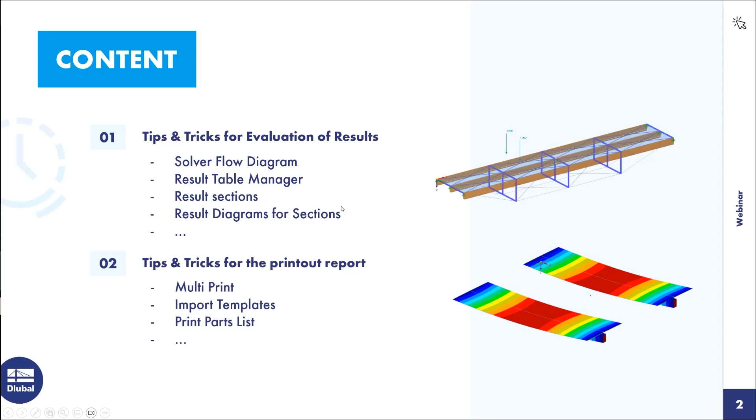I'd like to continue with the agenda for today. The first topic for today are tips and tricks for the evaluation of the results. Here I'd like to show you the solver flow diagram, the result table manager, the result sections, and also result diagrams for the several sections, and some more. The second part of the webinar will be about tips and tricks for the printout report. Here I'd like to show you the multi-print, how to import templates, and how to print the parts lists, and some more functions. Now I'd like to jump in the program.

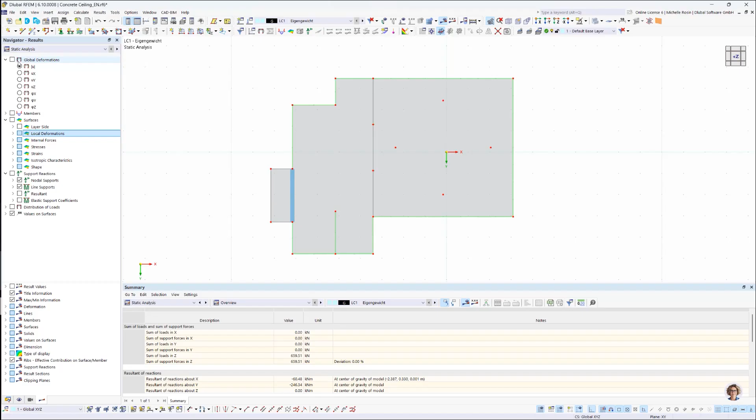Here you can see the model for today. It's a reinforced concrete ceiling with a joist and a balcony. For a better overview, I'd like to hide the reinforcement. I already did the calculation for this model. And the first thing I'd like to show you is the solver flow diagram. You can find it in the result table.

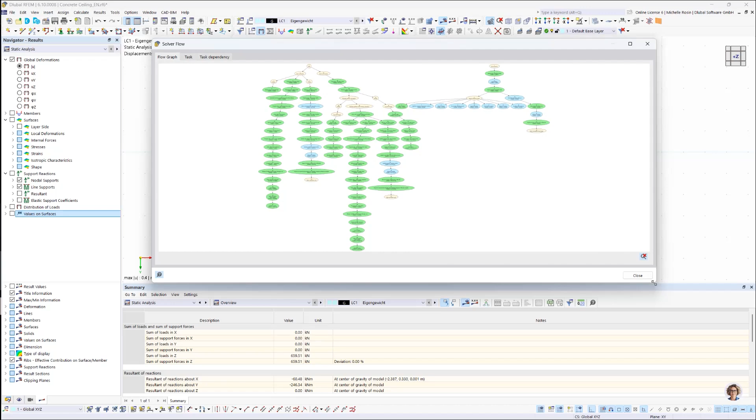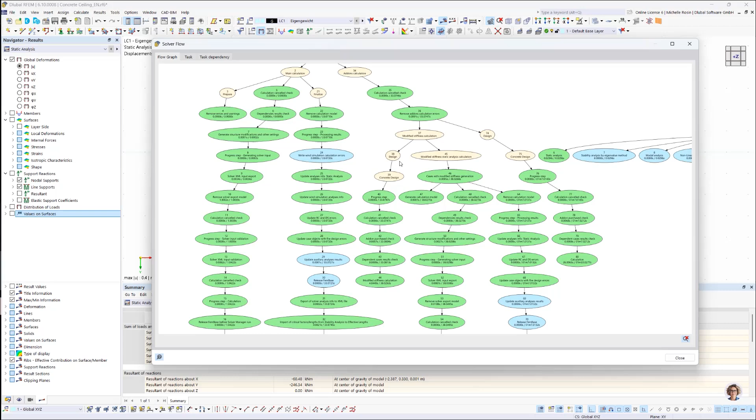It shows you what was calculated in which order, and shows you the dependencies of the several steps and how long the individual steps took. This can help to recognize problems in the calculation process and to identify problems with your hardware or to change something in the settings of the program.

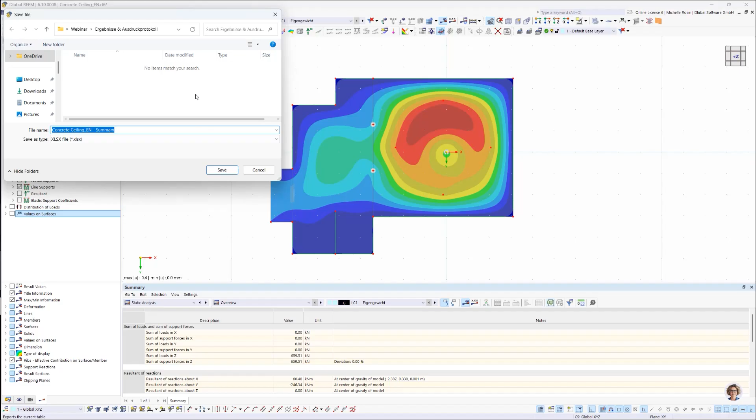The next thing I would show you is the export to an Excel table. You can also find it in the result table here, and when you click on the button, your file browser will open, but we don't save it yet. First, I'd like to show you the result table manager. Here you can display and adjust the filter properties of the result table.

It's also interesting with regard to the printout report, because by default the properties are taken from this result table, and if you can't find something in the printout report later, you can also look in the table manager to see under which headline it's assigned. You can also filter the displays in the result table. For example, when you just check or uncheck the fields.

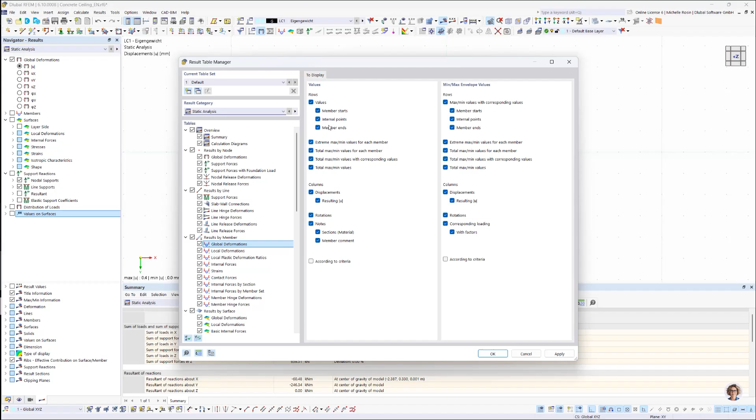And on the right side, you can also see many more filter settings to adjust. For example, you can also display only certain values and set the criteria here. But we uncheck it. You can also make your own templates. For example, when you click on create new set, you can make a template for your further project for the result tables.

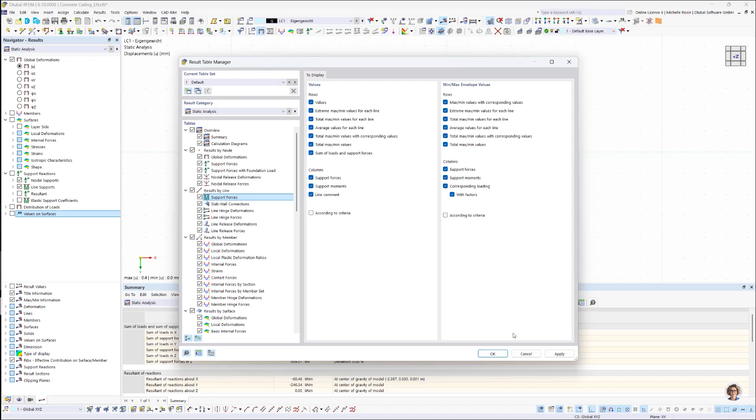The next thing I'd like to show you is how to search for special objects in the model. This is especially interesting when you have larger projects, because you can lose the overview of your members or nodes or something else. And for example, you can go to the navigator data and right click on the object you want to search and click on find. Then a red arrow appears here and shows on the object you selected.

You can also search the objects in the result table. For example, when we go to results by node, you can click on the node or the object you want to search, and then also the red arrow appears in the model.

Next, I'd like to show you the result sections. For this, we go to the navigator data under result objects and click with our right mouse button on the result sections and click on new result section. We have the possibility to define our section by 2 points and a vector or a line. Today we choose 2 points and a vector and can select our points here.

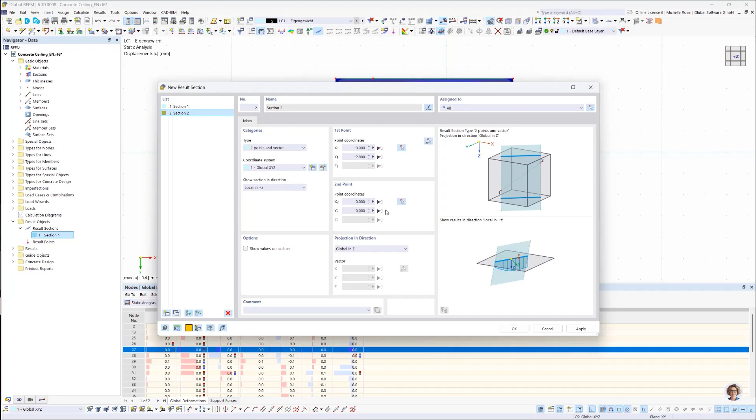The direction is the Z direction, that's correct, and I go to apply. Okay, and then we see our section 1 here. If we want to create another section, we can double click on section 1 and go on create new object and create our second section.

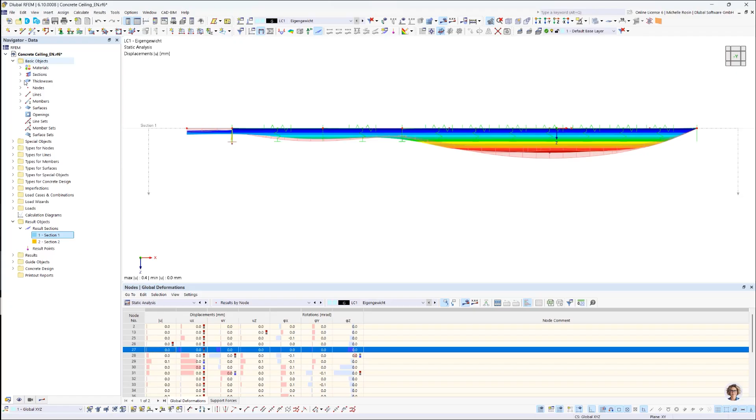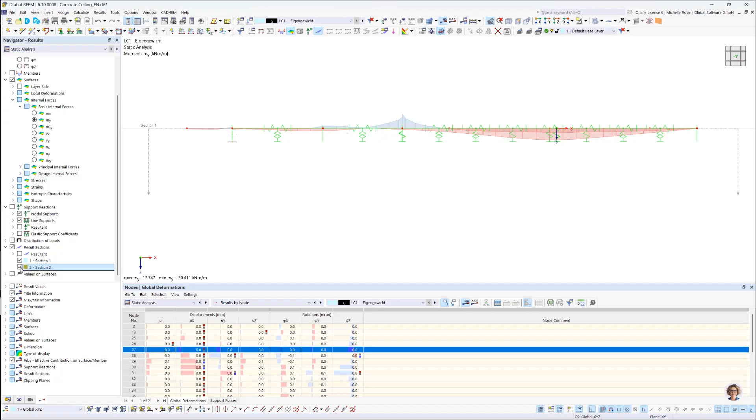Okay, now we have 2 sections, and we can also see our results here, but we don't want to see the global deformations. We can, for example, select our internal forces now and show it on one section or also on both sections at the same time.

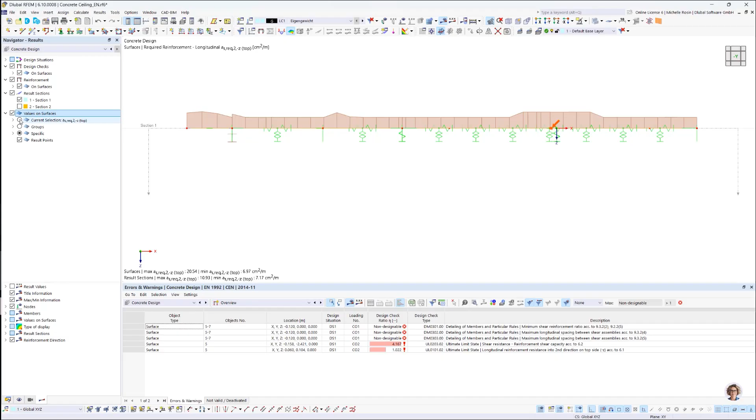But I'd like to show you the values for the reinforcement on the sections. We go only on section 1, and we can also click on value on surface and select current selection. Then we can see the values for the reinforcement at the different points.

Next, I'd like to show you the result diagrams. You can also select your sections here and check what you want to see here. You can also overlap the numbers so you have a better overview. You can also overlay your result sections when you type in this field 1 and 2 for the section numbers. And as you can see here, you have now both sections overlaid. This can be very helpful to compare the different sections with each other.

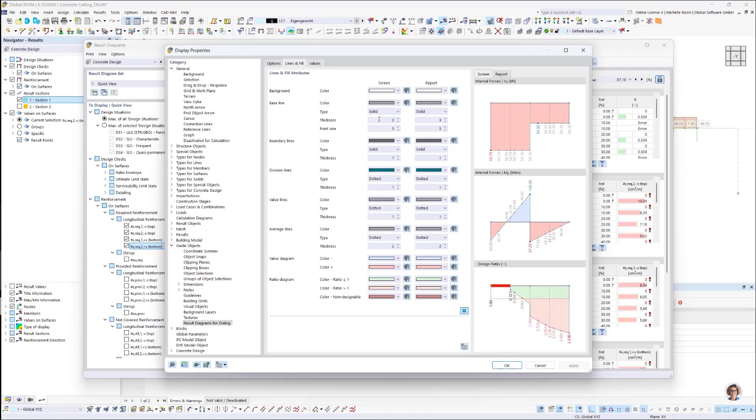And again, you have many settings for the display properties here. You can select which items or values should be shown or not. And you can also define the colors, etc. for your screen and for your printout report separately. And the red line here indicates that the area of the surface cannot be calculated.

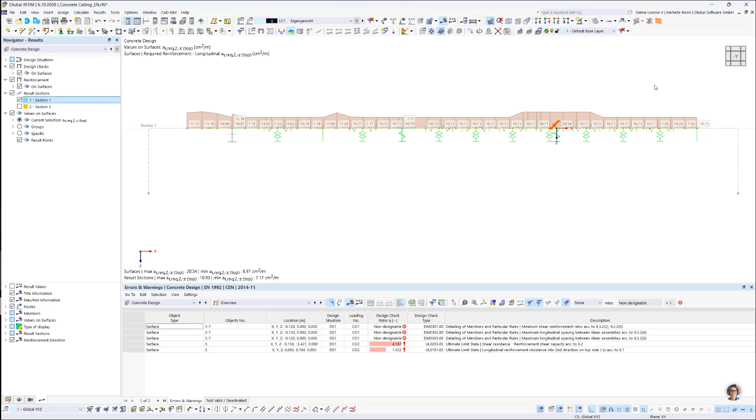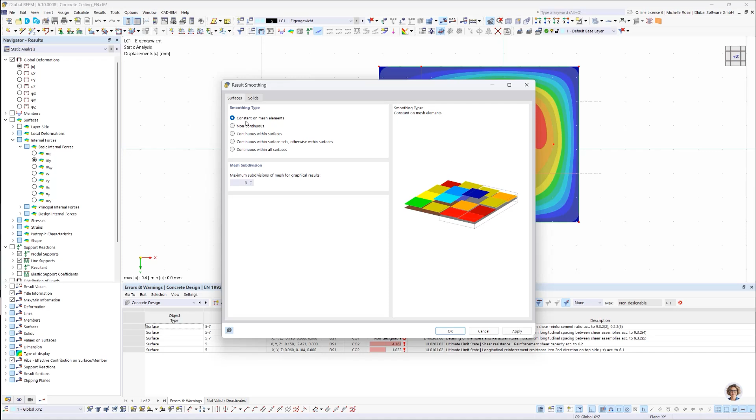Okay, the next thing I'd like to show you is the display of the results on surfaces. Maybe we go to the deformations to see it a bit better. Therefore, you click on Calculate and Result Smoothing. Here you can select how the results should be shown on the surface. For example, you can click on Constant on Mesh Elements. This is very common for steel design. And yeah, you have many other setting options here. We leave it by the default display option.

Okay. Another tip I'd like to give you is to reset all settings on Dlubal Standard. This is very helpful if you have big models and you cannot find some items or something else and they are like gone. You can click anywhere in the display navigator and click here on Dlubal Standard to set everything back.

Next thing I'd like to show you is how you can only display certain results. Therefore, I activate the control panel, and by the slider you can define which values you want to see or not. You can also click here to show, for example, only the extreme values. I'd like to see all values for now. And that was already the first part of the webinar for the evaluation of the results.

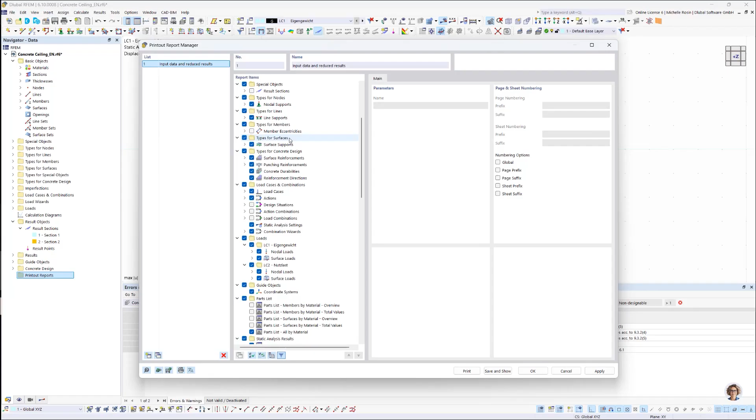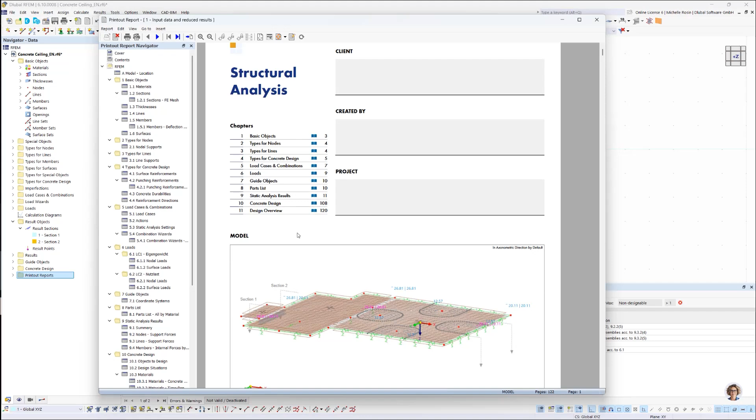If we click now on Save and Show, we create our printout report. This could take a few seconds. Okay, the report opens on my other display, and here we can see our report. Now I'd like to show you how to create a multi-print and also edit it afterwards.

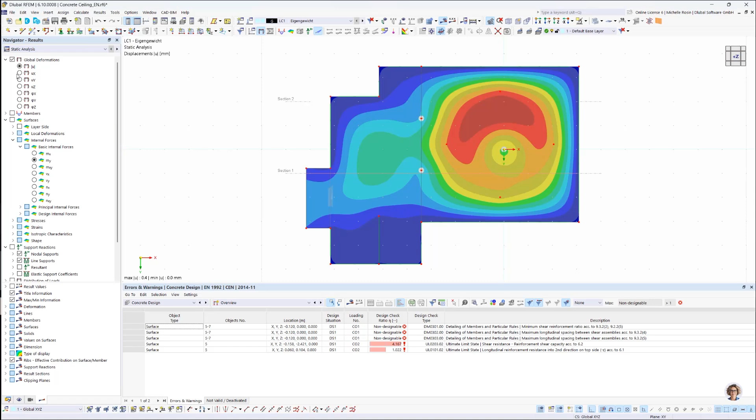For this, at first we want to create a view. We go on the Navigator Views to create our view. We'd like to see our sections in our... but not the deformations. We go back on the navigator views and click on create new view. We call it section 1. Now we create another view for section 2. And here we have both views.

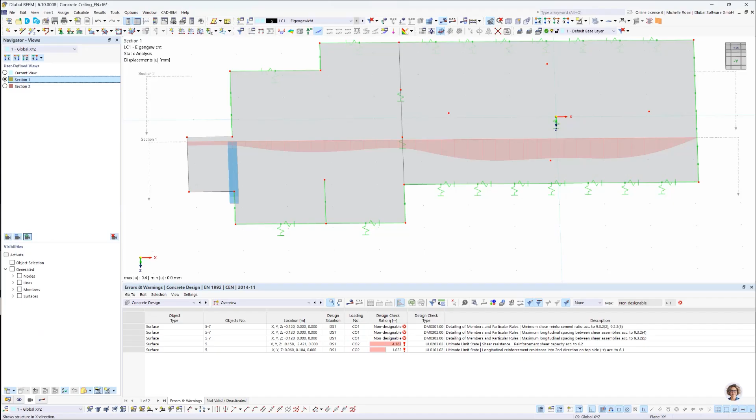If you want to change something here, it's no problem. You can also rotate your model and click on the view with the right mouse button and click on redefine. Then you can see your view changed. But we'd like to see this, so I click on redefine, and now we should have both sections.

To print it in the printout report, you can go to the printer sign here and click on the black arrow here and select print graphics to printout report. And then in window to print, you select multi-print. As you can see, some more tabs are open here, so you can define which graphics you want to see in your model. Predefined are always the model and the loads.

But we don't want to see the model itself, so we uncheck it. We don't want to see the loads. We don't want to see the results. We want to see our concrete design, especially our reinforcements. So we select our user-defined views for section 1 and section 2 and go here on the reinforcement and select all items we want to see.

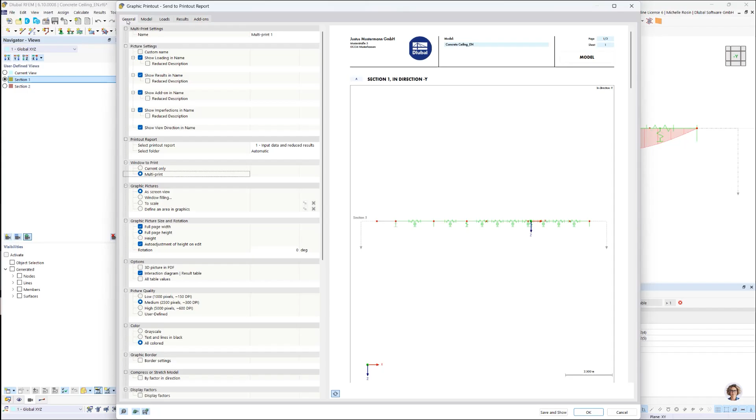And we can see that we have only one section on the whole page, but we want to have all 3 views of the required reinforcement for one section on one page. So we go to graphic picture size and rotation and click on height and change this from 100 to 30%. And click on Update here. Okay, now you can see we have the 3 pictures on one page.

We also want to delete the color scale here. We can do it when we scroll down to color scale and uncheck it here. Okay, and now we can click on Save and Show. And the graphics will appear in our printout report here.

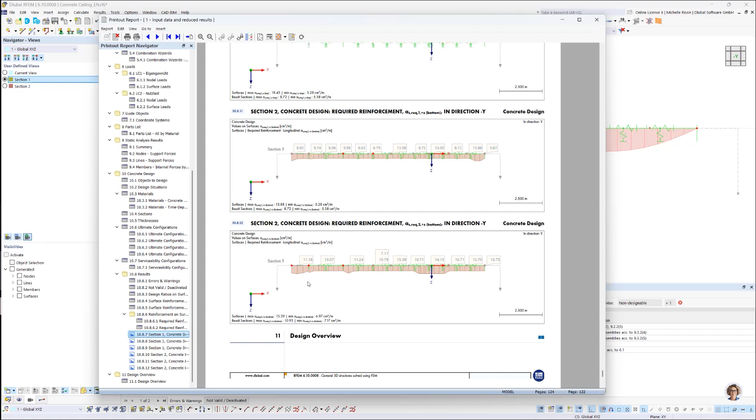Okay, but now the question is how we can edit the multiprint. Therefore, we click this button, Edit Multiprint, and choose our print. Then our multiprint manager opens again. And as you can see, you have a new tab here. It's Image Actions. Here you can see all the created images and choose if you want to update them, or you can also choose no action. This is helpful if you adjust things in the general settings, but you don't want them to be applied to the already existing images.

For example, we now want to remove 2 images. We want to only show one top and one bottom reinforcement. So we have only 4 images now. Now we go back to the General tab and click on Update. As you can see, we only have 2 pictures for section 1 now and 2 for section 2. And we can just adjust our height again to 50%, so we have both pictures for the section on one page.

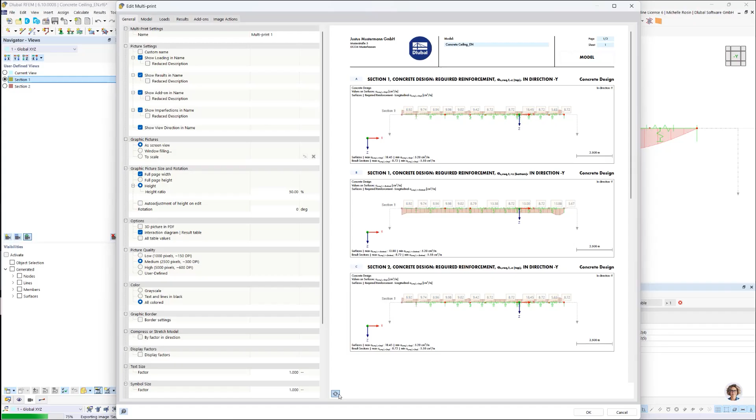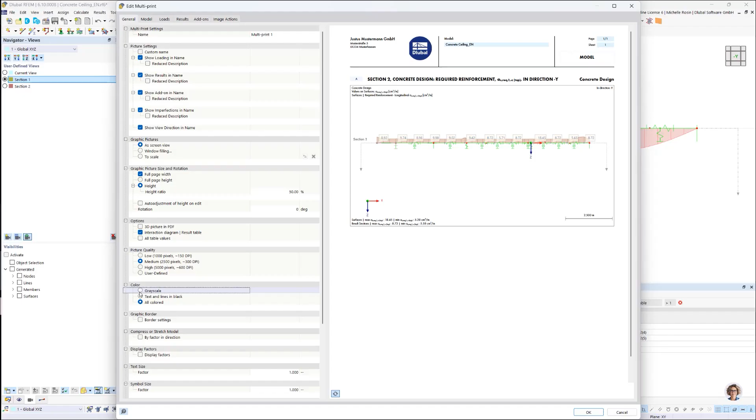Yes, and if we, for example, go back to the image action, we can see that we have removed 2 pictures. And for example, I choose no action for the graphics of section 2 and go back to the general settings and choose color grayscale, for example, and click on OK. And open my printout report again. Here you can see we have only 4 pictures now, and I click on Update.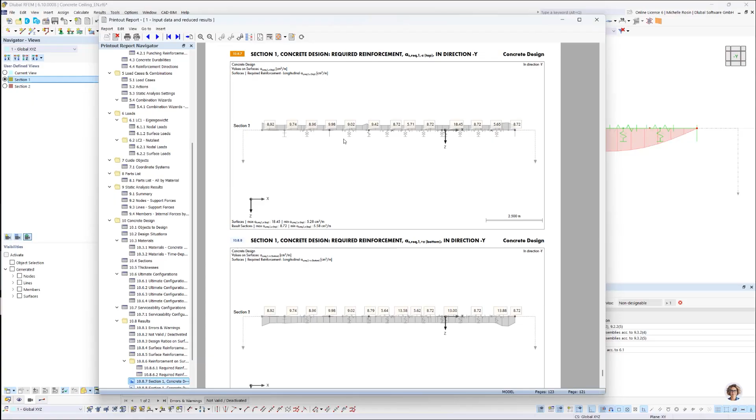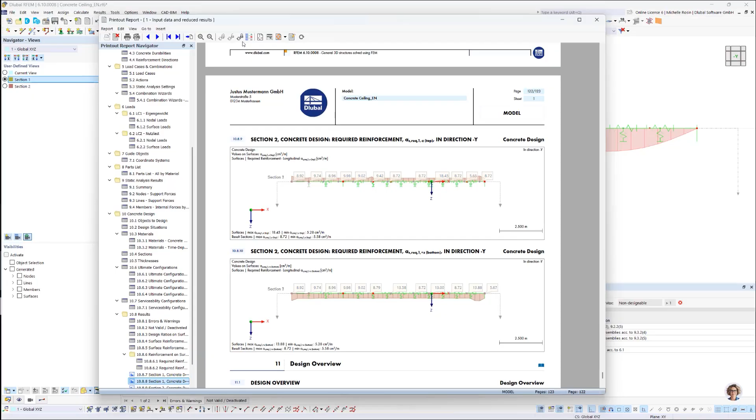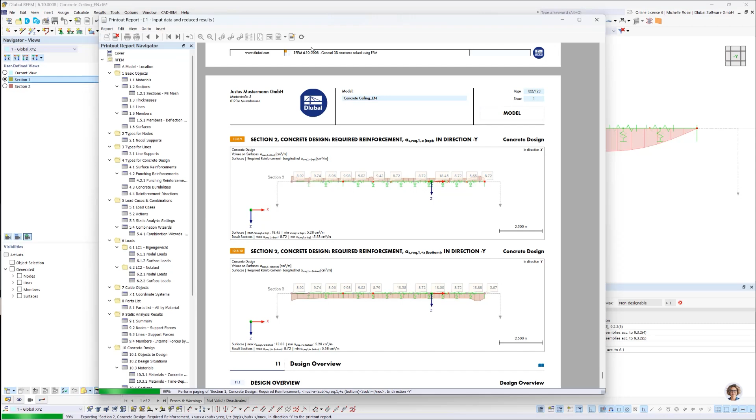Yeah, as you can see, the pictures we updated are now in gray, and the pictures for which we selected no action are still in colors. But as you can see here as well, the height is still on 30% here. I think that's because I updated both in one step. So we go on Edit Multiprint again and click on the 50% again and OK. And go back to our printout report again and update it. So now it should be 50% and is gray as these pictures as well, because the grayscale was already selected from the settings before, and we updated all pictures now.

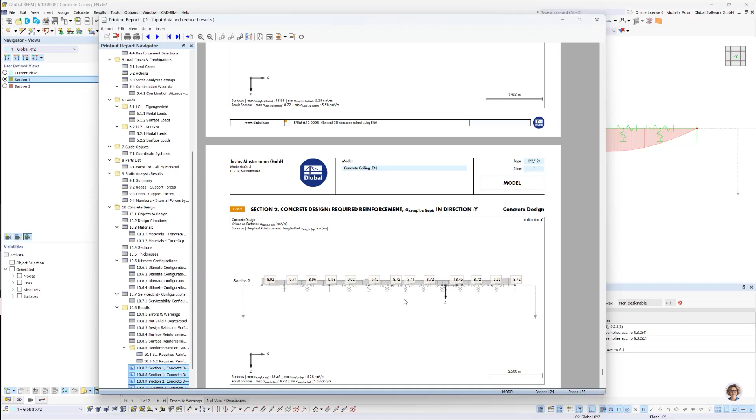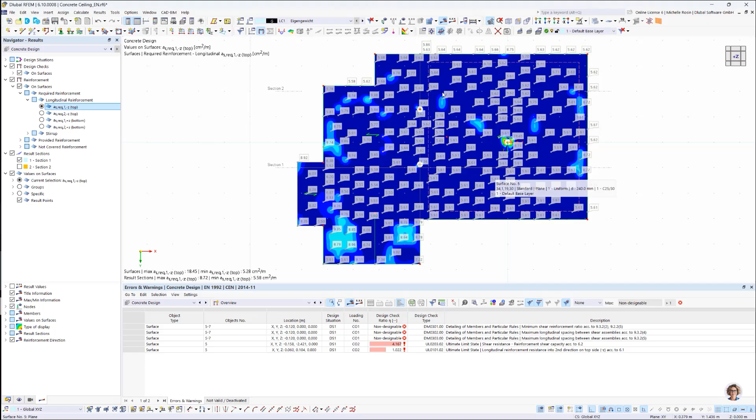One thing regarding the multiprints, which is requested very often, is to tile or to sort the pictures next to each other vertically. It's not possible via the multiprint selection, but therefore we go back to our model and choose the view we want to see, like this. We want to see not the deformation, but for example, the required reinforcement, like this. For the reinforcement, it's also very helpful to show the values on the surface. This is already selected here.

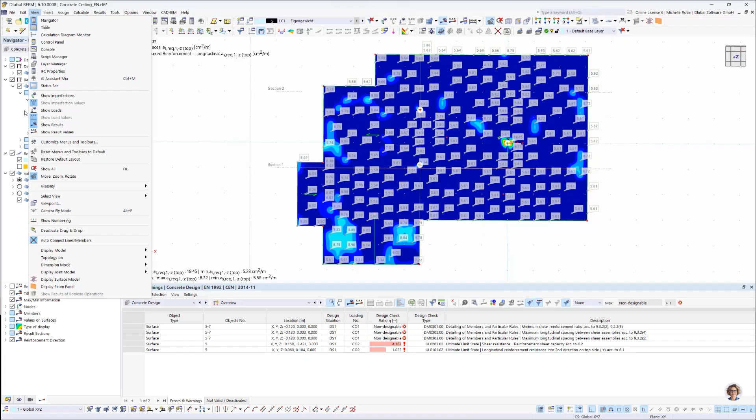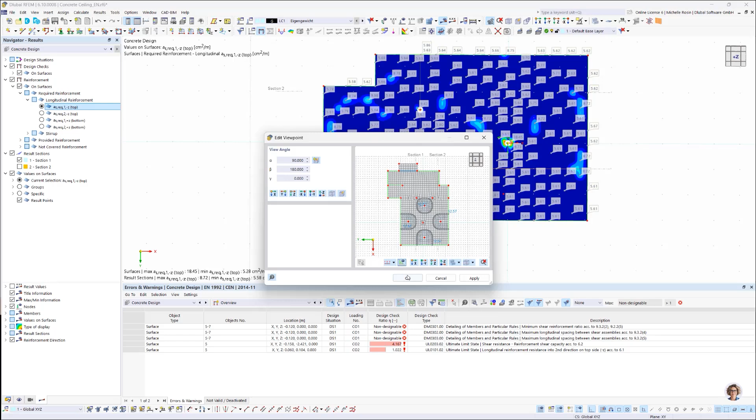But now I want to rotate my view. I can do it by rotating the model, but that's not very accurate, so I go to View, select Viewpoint, and now I can define my view angles. I can also show the model in the background, yes. And apply. So we can turn and rotate our model by 90 degrees.

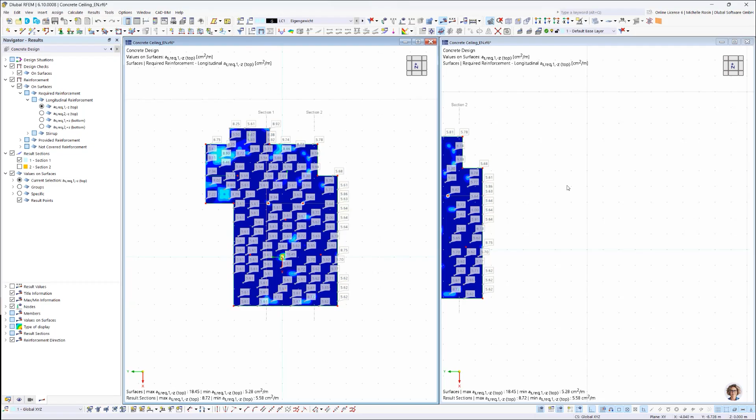And now we create a new window and tile our screen vertically. So we have two windows next to each other. Now we can zoom in a bit to see the numbers a bit better. And now I choose here the bottom reinforcement. Okay, and now I can print it to the printout report by the printer button here.

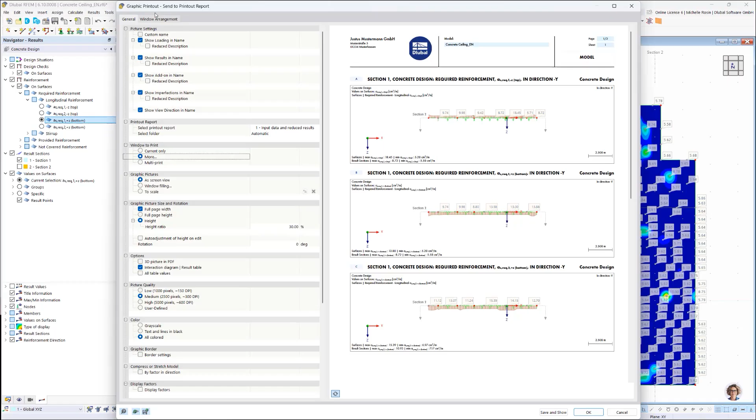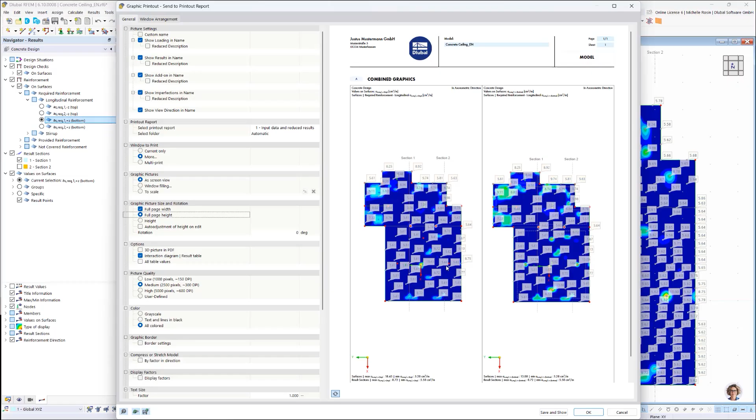But now we don't choose multiprint, we click here on More and then go to the tab Window Arrangement here. And as you can see, when we have checked as on current screen, it's displayed like we have sorted our windows on our screen. Now we go back to General and click on Full Page Height to have it over the full page again. Okay, and then we click on Save and Show, and our graphic appears as combined graphics in the printout report.

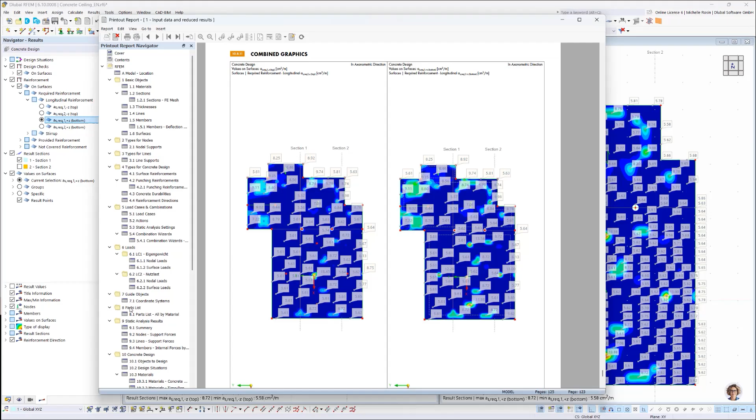The next thing I'd like to show you is the parts list. We have it here, and as you can see, it's split on 2 pages. That's not very good, and so I only click on the headline and select Start with New Page. So we have our full parts list on the second page.

This is now sorted by the material. We only have 2 materials, the steel and the concrete. So it's not a very long part list. If you have a larger project, it's of course longer. It can happen that you cannot see the part list here. This could have 2 reasons.

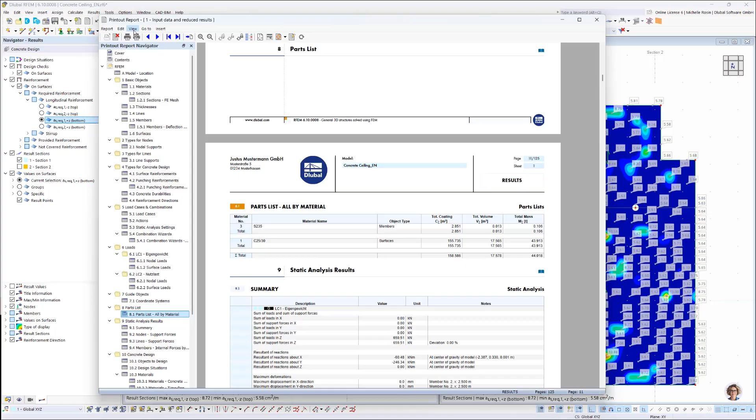The first, you have not selected it in the printout report settings at the beginning. Therefore, you can click on Edit Printout Report and go back and select your part lists here. But this is already selected and we already see our part list.

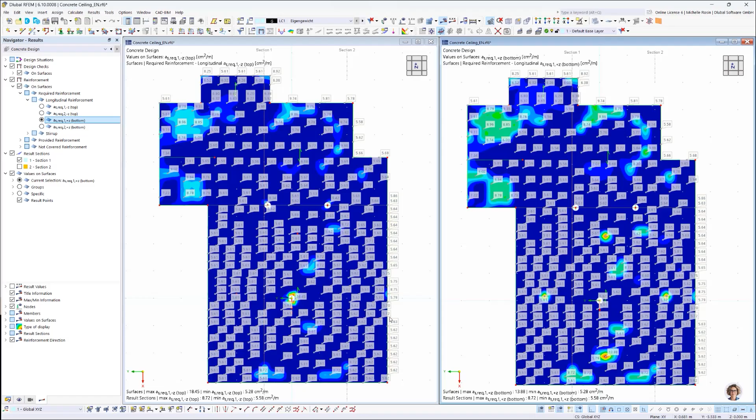Another reason why you cannot see it is that it's not calculated yet. Therefore, you go to Calculate and Generate Part List, and your part list will be generated. And you can then print it in the printout report. Now I'd like to show you some other things that can be printed in the printout report. For example, the result diagrams I showed you before.

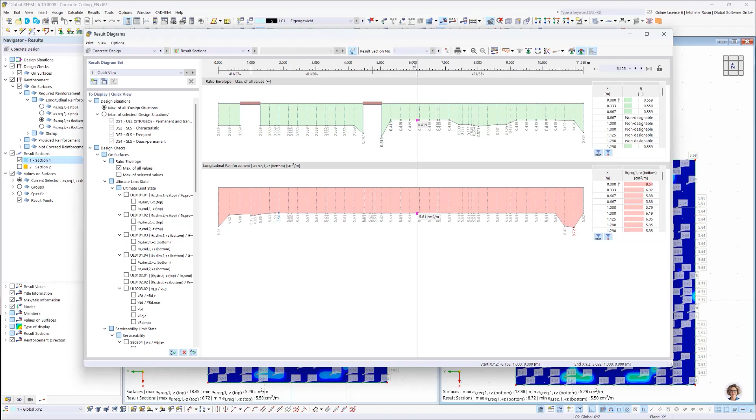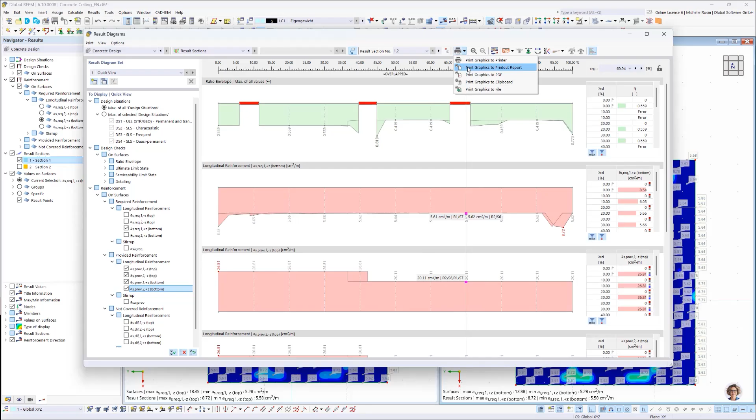Therefore, I go back to result diagrams and, for example, overlay both sections and overlap the results again, and choose all my 4 longitudinal reinforcements and click on the printer image again and click on Print Graphics to Printout Report.

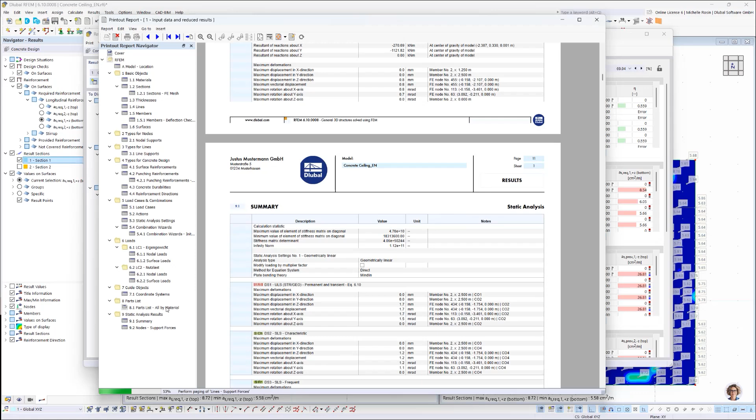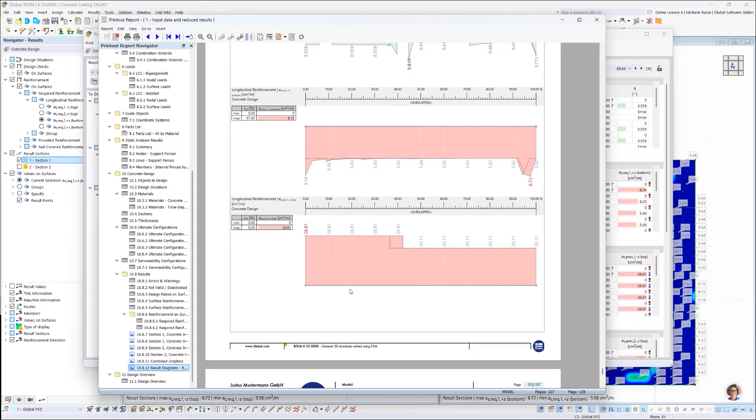And then we can again change some general settings and save and show, and can print it in the printout report as well, and also see it here under results in the printout report.

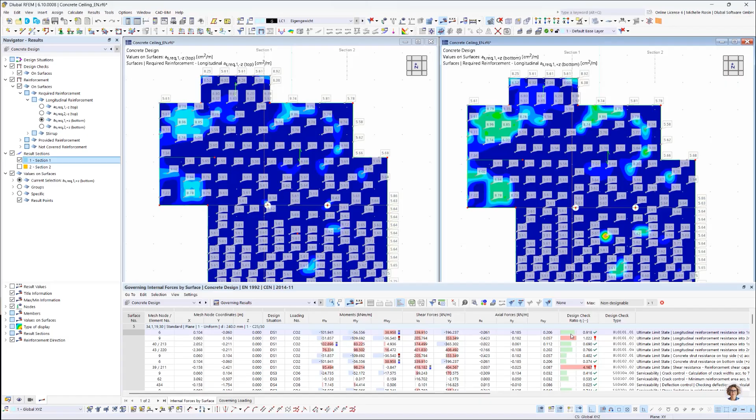One other thing that might be interesting for you is you can also print the calculation of the design checks in the printout report. Therefore, you double click on the design check and see here on the right side the whole calculation, and you can print it also via the printer symbol in the printout report.

What I also want to show you, I closed my report. Normally I have it on my second screen, but I closed it. The next thing I'd like to show you is how to translate the printout report in several languages. Therefore, you go on Edit, Set Language, and for example, we can choose German now.

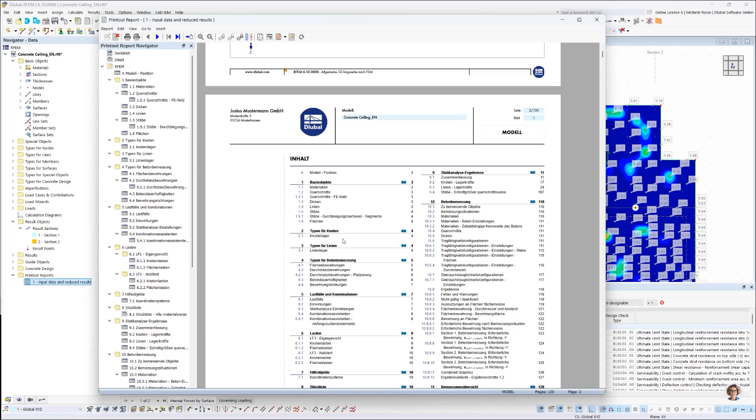And now your whole printout report will be translated in the selected language, as you can see here. But now I go back to English again. Okay.

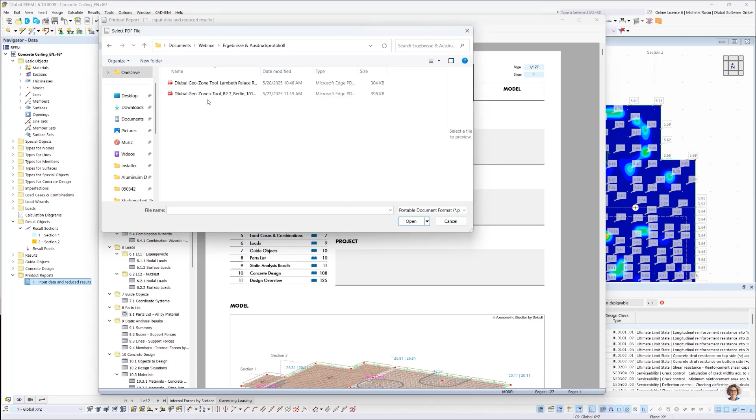You can also insert different items, for example, images from your file explorer, texts, or PDFs. I'd like to show you how to insert a PDF, for example, a map for earthquakes or wind zones or something else. I just downloaded one map from the Dlubal Geo-Zone Tool. It's online. You can select your location and then download your map from the Dlubal website.

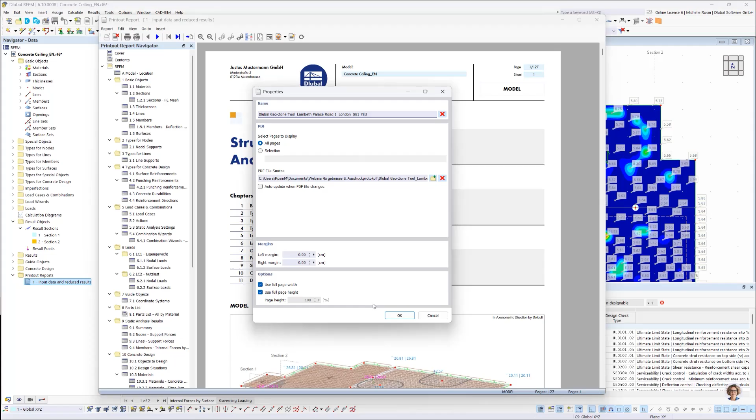And now we click on OK, and the PDF is added to the printout report. It's on the last page here. As you can see, we have our snow loads and wind zones and so on. But I want to have it in another position, so we can just move our objects by drag and drop and put it in the place we want to have it.

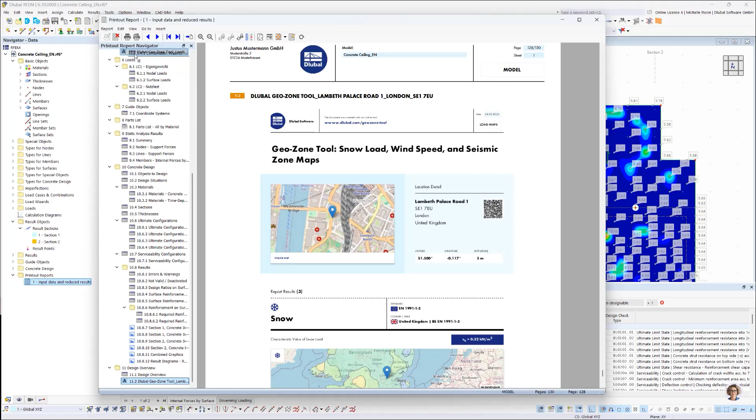I want to have it right on the... Oh, that didn't work, on the first position. Okay. And as you can see, we have it now here on the second page of our printout report.

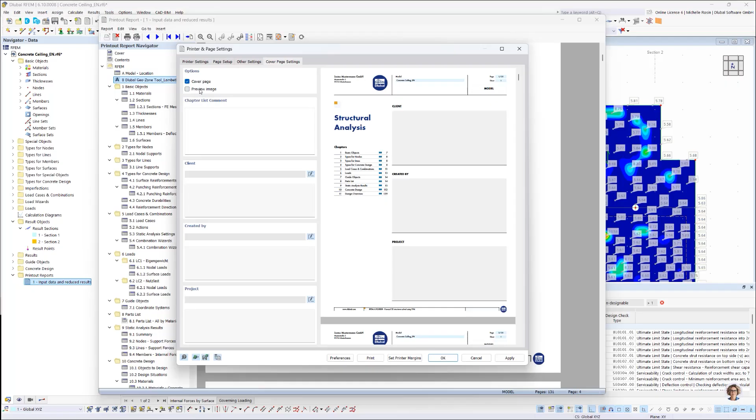Also in the printer settings, you can do several settings for the cover. For example, you can remove the cover page, you can remove the preview image, and you can also add some information about the client, the project, and something else. Also, when you go on other settings, you can remove the header and so on. Now I want to cancel because I don't want to print it now.

Yeah, and that's it from my side to the result evaluation and the printout report.